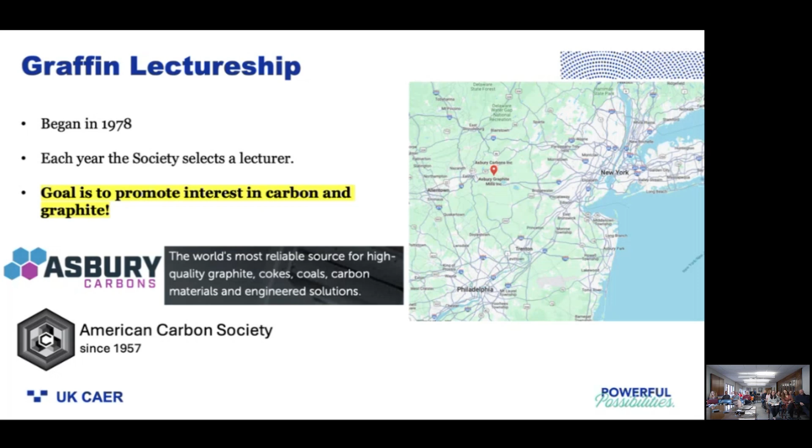I thought I would just kick off by describing some of the applications. I'm sure many of you are very familiar with these, but it gets us moving down the path in this area. Obviously, commercial aerospace is probably the largest synonymous area of carbon fiber, and the single largest demand side for carbon fiber for passenger aircraft. Obviously, you want really lightweight, strong materials for aircraft.

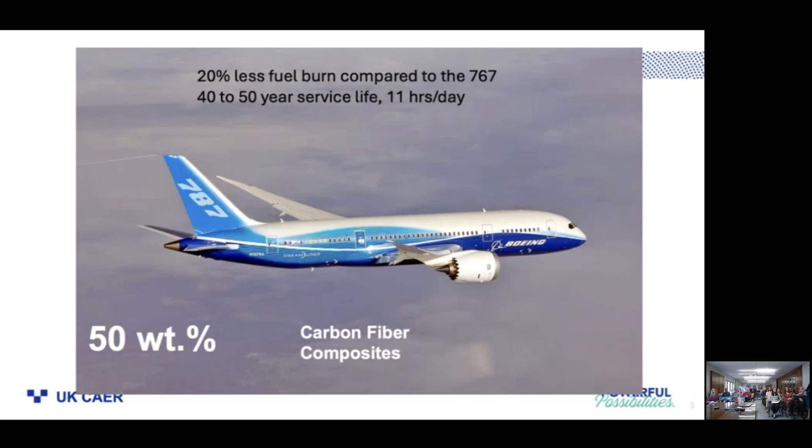Boeing picked up on this in the early 2000s and produced their 787 using something on the order of 50% weight carbon fiber composites to essentially enable a big jump in fuel economy. That's a big deal for an aircraft that has a service life of 40 to 50 years and is flying on average something about 11 hours a day. It's a lot of fuel. But the same physics apply to other things, and I'll get to that.

Another area that carbon fiber composites are really growing in is wind energy. You guys have seen these windmills, and they're made usually with 3 large wind blades.

And those blades, as they get longer, they circumscribe a larger circle. That's directly proportional to the amount of power they can generate. Also, as those blades go higher in the air, they can generate more power. But if you make a longer blade, you need to stiffen it or it's going to flop around, which is bad news. So they incorporate what they call a spar cap, basically an I-beam of sorts made out of carbon fiber, that goes on the inside of these rather large windmill blades.

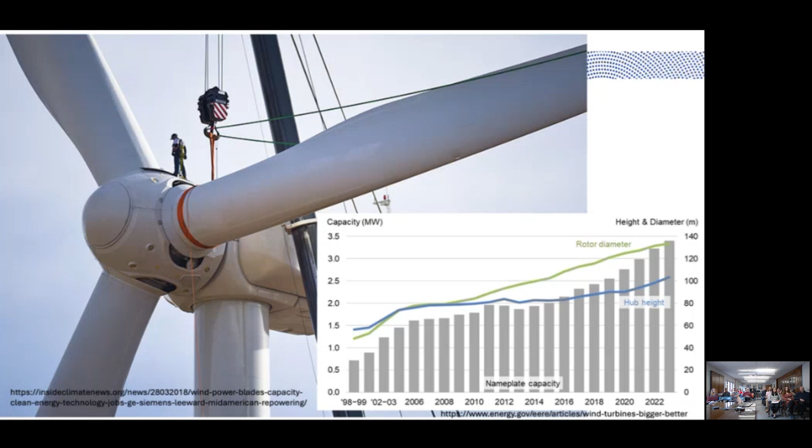But in any case, even carbon fiber wheels in these kinds of cases, now really rare, right? But larger volume carbon fiber production cars have occurred. This is BMW and SGL's joint venture into the production of their i3 vehicle. Now, that vehicle is no longer produced, I think they stopped production in 2022, and I'll touch on why I think that might have occurred. But the same physics applies: if you can lightweight vehicles, you can improve their fuel economy, or just the energy utilization of the vehicle.

And the same thing all the way down to bikes, right? So serious cyclists are looking at things like carbon fiber bikes and are willing to pay a pretty large price for those.

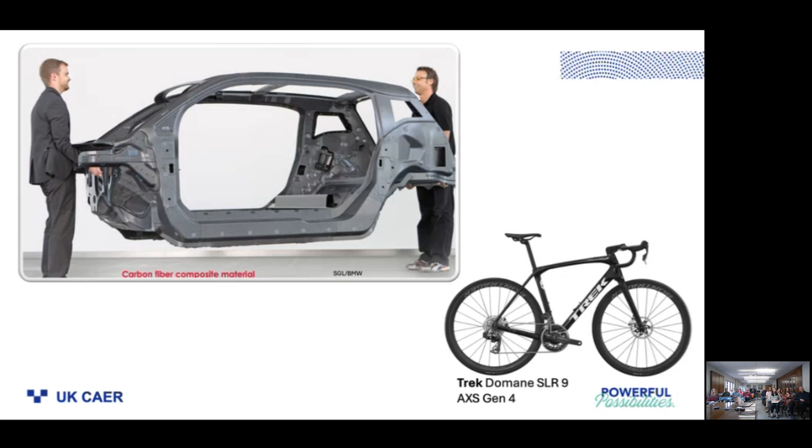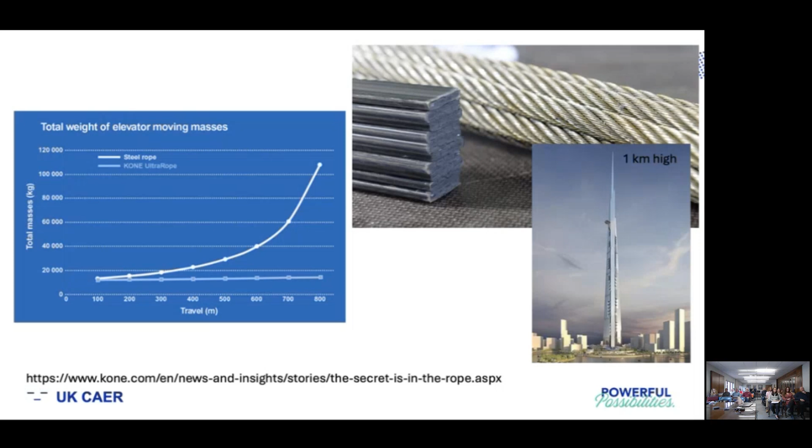This is an interesting application I thought I would also highlight because it really capitalizes specifically on the high tensile properties of carbon fiber - really, it's the high tensile strength per unit density. In really high-rise buildings, these elevator shafts containing multiple steel cables, the weight of the steel cable itself can far outweigh the car and the people in it. And so as you go ever higher, the advantage of using a lightweight tensile cable, in this case, is pretty evident. So I thought it was an interesting application for using high tensile strength carbon fiber.

And then in the world of science fiction is the elevator to space. Folks have seriously studied this, and it is in principle possible, but in practicality not, because we don't have a material that can handle the amount of tensile stress - it effectively weighs too much to do. This was made famous in Arthur C. Clarke's book, The Fountains of Paradise, in 1979, but there were concepts of this going back into the 1950s.

But it all comes down to the specific properties of the carbon fiber, and I want to define that. That's the strength of the material on the y-axis, the strength per unit density of the material, in this case versus the modulus - the resistance to deformation under load - divided by its density. So if we look up in the upper right quadrant of this chart, we'll find the highest performing lightweight materials in tension that we know of.

All of these in blue, the blue open circles, are carbon fibers derived from polyacrylonitrile, and we'll get to that and unpack it a little bit more. But these far outperform other materials, for example metals down here in the very low left corner, as you might expect, and then some other carbon fibers and glass fiber.

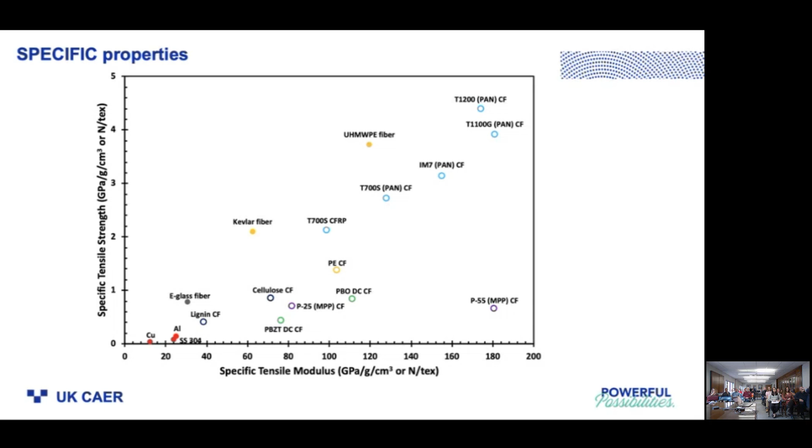It's interesting that polyethylene fiber is performing so well here, but we can't forget that polyethylene doesn't like to be heated much, right? And the other thing is that polyethylene strains more, it actually stretches more. So these carbon fibers, used to make composite overwrapped pressure vessels containing 10,000 psi hydrogen for example, have to contain that measure of load, but they don't need to expand a lot either, and they have to resist temperature. Those concepts apply across all the applications I talked about: primary structure in aerospace, even down to hoisting cables for elevators.

Okay, I want to now dive back into history a little bit. Where did all this come from? How did we land on making fibers from carbon for purposes like strength? Well, that story begins in the middle of the 1800s, when folks were looking at trying to produce artificial light.

And the one that comes up, of course, is the graphite arc lamp that was lighting the streets of London at this time. You have two graphite elements or electrodes, and you run current through them, striking an arc between them. It's almost like a welder, right? So this bright light was lighting the streets, buzzing along, and it was all made possible by the carbon electrodes.

At the same time, there was a lot of interest in getting to an incandescent light bulb. After all, this is sort of the height of the Industrial Revolution. Folks, of course, want to be able to light their homes, right? Because we're using candles and whale oil lamps, but really want to light the factory floors and keep production moving.

And the incandescent was one of the things that folks were really trying to get at. Of note was the British inventor, Sir Joseph Swan, who between 1850 and 1880 was doing all sorts of experiments to land on a functioning light bulb. In doing so, he patented this in England and in the US as well, describing that he could produce a conductive element from carbonized cotton thread. Other materials would essentially burn up or melt when you tried to run enough current through them to have them light up.

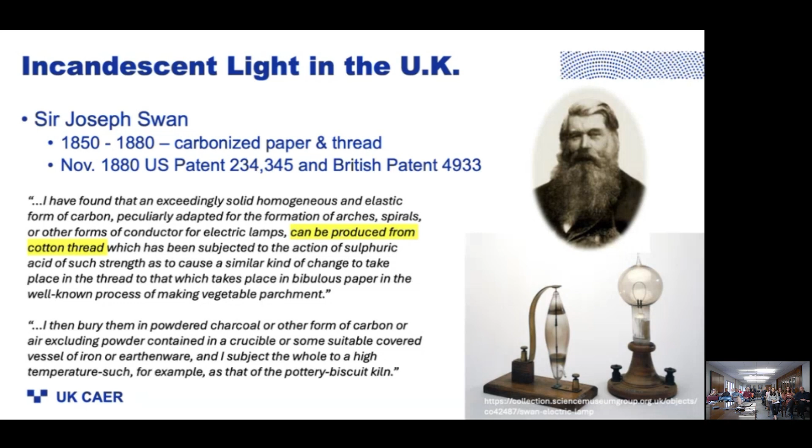So I found this to be an interesting historical point. Right around the same time, in fact a couple of months earlier, although exactly who did what first is certainly controversial, Edison patented in 1880 in the US the same effective outcome: carbonized linen thread, cotton thread, wood splints, and so on and so forth.

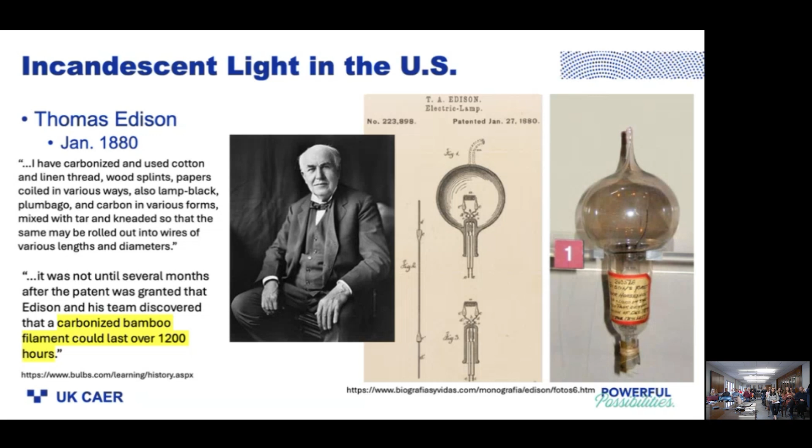These are shown - you can't really see them - but in the light bulbs, these are brittle filaments. They wouldn't really be a carbon fiber that we know of today with any sort of supple character, but they survived the current and were able to incandesce. Not long later, Edison reported a carbonized bamboo filament that got up to 1,200 hours on a light bulb in the 1880s. This was all supplanted by the tungsten filament light bulb, which came into existence around 1904, except for some really boutique applications of carbon filaments on Navy ships.

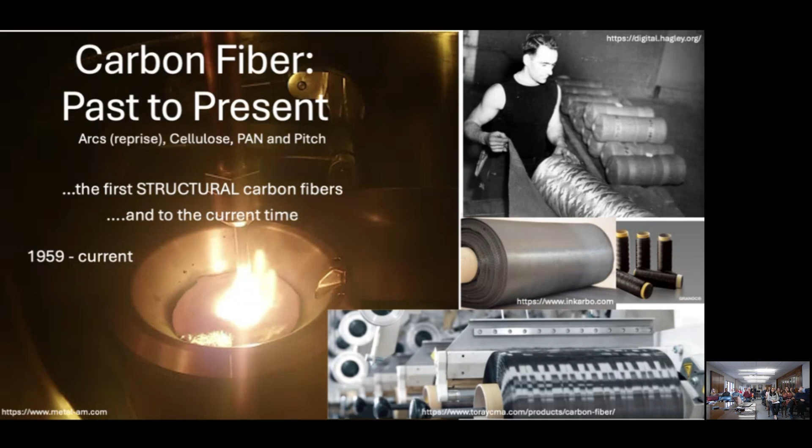Now, when we think of carbon fiber, we don't really think of filaments and light bulbs, but there's a tie back to this. The fibers that we think of are supple and strong and can behave like a textile or a fabric. These, however, have their roots in the arcs and the light studies that were going on. We'll talk in a minute about cellulose fiber, PAN fiber, and pitch fiber, but I want to get on to the first structural carbon fibers, which were about a century later, starting around 1959.

Around this time, Roger Bacon began work at the Union Carbide Corporation in Parma, Ohio, and in the late 1950s was studying the triple point of carbon - the point at which carbon, solid, liquid, and vapor, that's right, vaporized carbon, exist in equilibrium. He was working at an incredibly high temperature, something on the order of 3,600 degrees C, achieved by doing arc discharge. He was running current through graphite electrodes, striking an arc at extremely high temperatures, albeit very transient, but under extremely high pressure.

I think this was high pneumatic pressures of noble gases in this cell. And when he took the cells apart, he noticed over and over that on one of the electrodes, there had grown all these whiskers of graphite. He described breaking up one of those electrodes, and it looked like Christmas tinsel of all these little whiskers of graphite. He took those out and began to study them and found that he could take these little whiskers of graphite and kink them back and forth, and they would bounce back.

He was able to test them in tension and found the tensile strength of these was something around 20 gigapascal. Just to be clear, that's more than double the tensile strength of the best carbon fiber you can commercially lay your hands on these days. Also with a modulus of about 1 terapascal, or 1,000 gigapascal. This is consistent with loading graphite along the basal planes like a perfect single crystal graphite - these were essentially perfect single crystal whiskers of graphite.

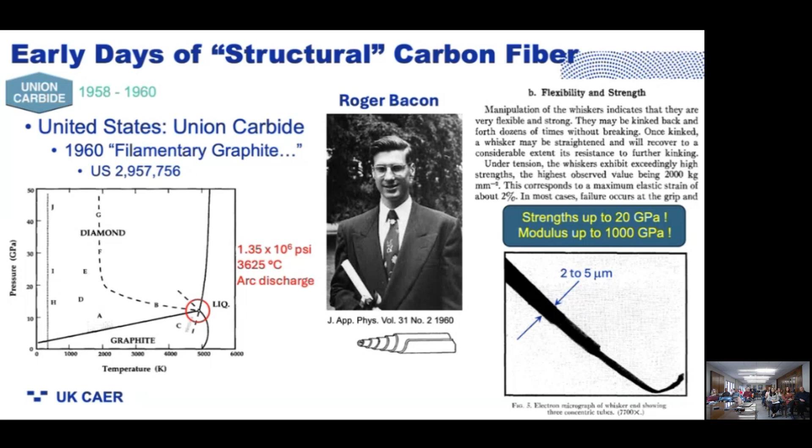Union Carbide knew they couldn't really scale up all these little whiskers of carbon. So what did they do? They looked back and remembered, almost a century before, folks had been carbonizing cotton, cellulose, to make light bulbs. And at the same time, DuPont had established one of the first synthetic fibers, the rayon fiber, based on cellulose, started in 1924. So about 30 years later...

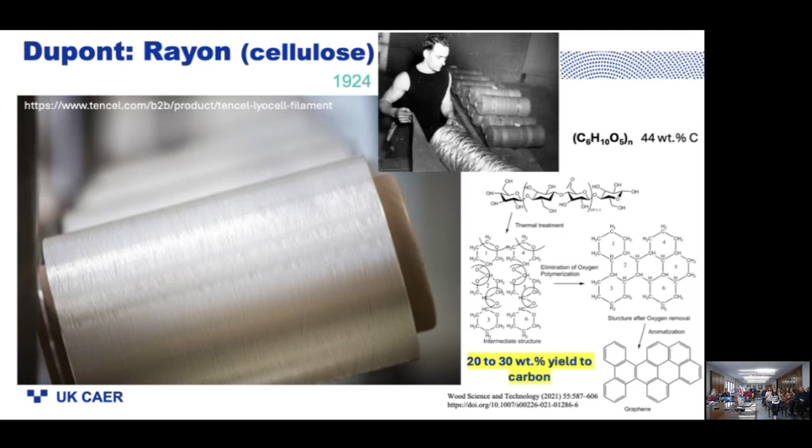Union Carbide began to study carbonizing fibers of cellulose for higher strength. It should be pointed out that cellulose has got a lot of oxygen in it, which isn't good if you're interested in carbon yield. Something like 20 to 30% of the weight of the cellulose was converted to carbon. It's kind of low, but nonetheless they were successful in producing a carbon fiber with pretty good strength for the day, about 900 megapascals.

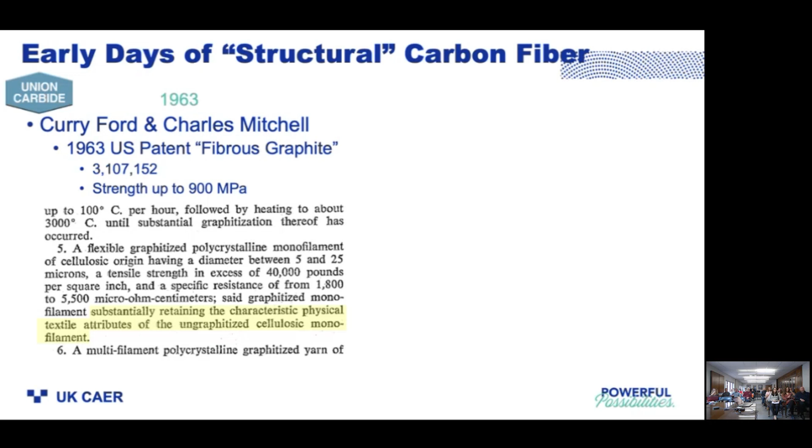The following year, 1964, Bacon and his colleagues patented what they called a hot stretching process. They took these cellulose fibers through furnaces and stretched them while forming, producing a modulus of 172 with a strength of 1.25 gigapascal. Low by today's standards, but in 1964 this was the first structural carbon fiber ever produced, marketed as Thornel 25, and it went into NASA's Gemini program at the time.

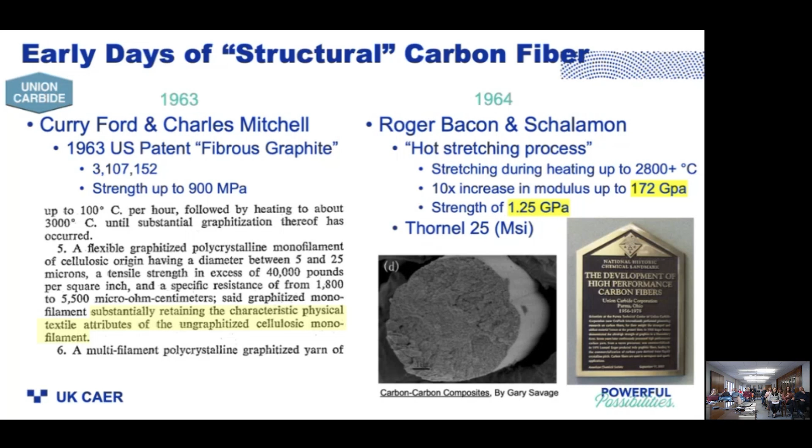I should point out that for this and other things, Union Carbide was awarded a National Historic Chemical Landmark. So up in Parma, they have this landmark for the development of high-performance carbon fiber.

Ray Houtz was a chemist there who described that he could see the fiber would change color as it was heated, from white to yellow to brown to black, and that the black yarn was remarkably stable to further heating, even in a Bunsen burner flame. So this gave insight that this fiber too could be of great interest as a carbon fiber.

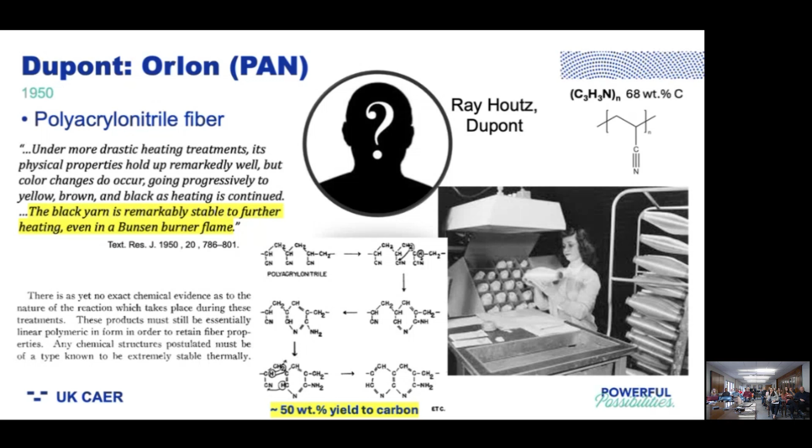In the same 1950 paper, he described also the chemical conversion of polyacrylonitrile to the stabilized intermediate, essentially. And folks were recognizing that something on the order of half of the mass could be converted to carbon.

In Japan, at the Government Industrial Research Institute in Osaka, in the late 50s, Akio Shindo got his hands on a Scientific American magazine that reported the cellulose fiber carbon. And he got a sample of DuPont's Orlon fiber and began to carbonize that in his labs in Japan.

What he did at first was take a really tiny amount of the pan fiber and put it in his furnace, converting it to carbon, and observed that out of the furnace came a very nice, supple fiber that he could wrap around his fingers and pull. However, when he repeated the experiment with a lot more fiber, what came out was very, very brittle.

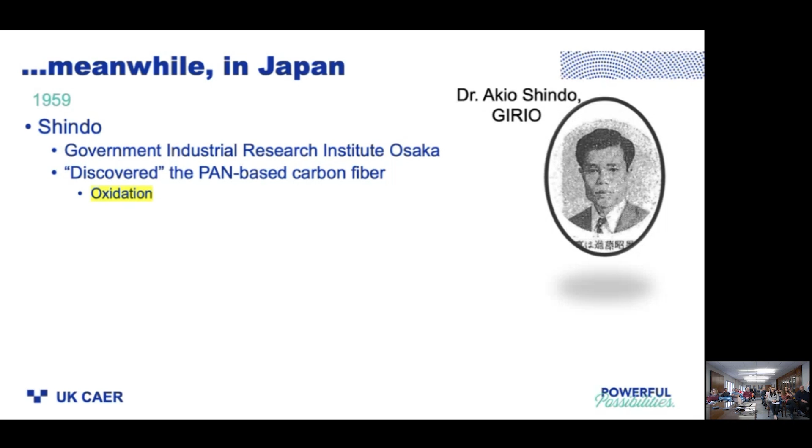This gave us, for the first time, insight into the role of oxygen in the very front-end heating process. In the latter case, he consumed all the oxygen and didn't arrive at a nice oxidized intermediate, and the resultant carbon fibers were quite brittle. So this was a big leap in pan-based carbon fiber, occurring right at the end of the 1950s.

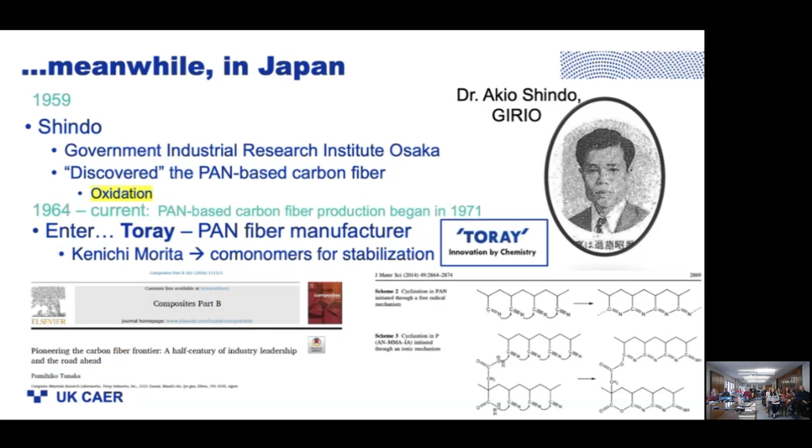In 1964, Toray, the big Japanese fiber manufacturer, got quite interested in this and effectively commercialized the pan-based carbon fiber, which hit the market in 1971. They did a lot of work in comonomers for stabilization around that time as well, but they were really first on the scene for the pan-based carbon fiber.

In England, in the late 60s, at the Royal Aircraft Establishment in Farnborough, Dr. William Watt and his team were also really interested in carbon fiber. After all, they had come from the World War II era and were trying to stay on the cutting edge of aviation. They knew that these really high strength, lightweight fibers were going to be enabling for new generations of aerospace materials.

His crew is credited with applying tension during the stabilization of these pan fibers, much like Bacon did in the conversion of the cellulose fibers. In fact, in his patent, it describes the necessity to restrict length shrinkage, or even stretch the fibers, during the oxidation process.

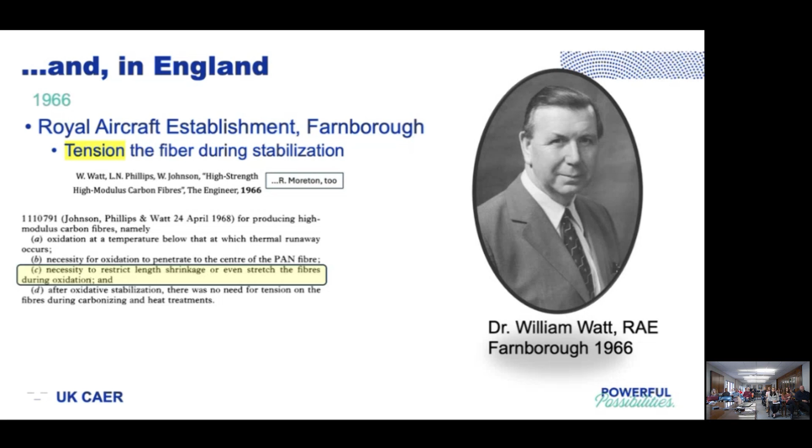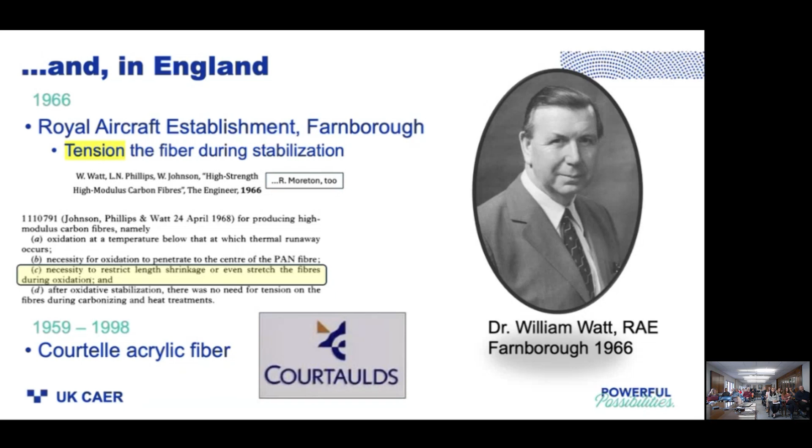In England, the fiber manufacturer there was Courtaulds, sort of the DuPont of England, and they were producing acrylic fiber. They also teamed up with the Royal Aircraft Establishment and Rolls-Royce to essentially commercialize and scale up PAN-based carbon fiber in England. Back in Japan, in the mid-60s, Otani and his group reported for the first time making carbon fibers from pitch.

Now, I think you guys probably know a little bit more about what pitch is. A lot of folks have no idea, but briefly, unlike a polymer, it is comprised of small molecules - in this case, these polycyclic aromatic molecules over here on the right. Otani showed that he could spin these into fibers and convert those into carbon.

And the yields were really high - something like 50 to 80% of the mass of those fibers will be converted to carbon. So Union Carbide kind of latched onto these results as well and doubled down efforts to try to produce carbon fibers from what they call the mesophase pitch.

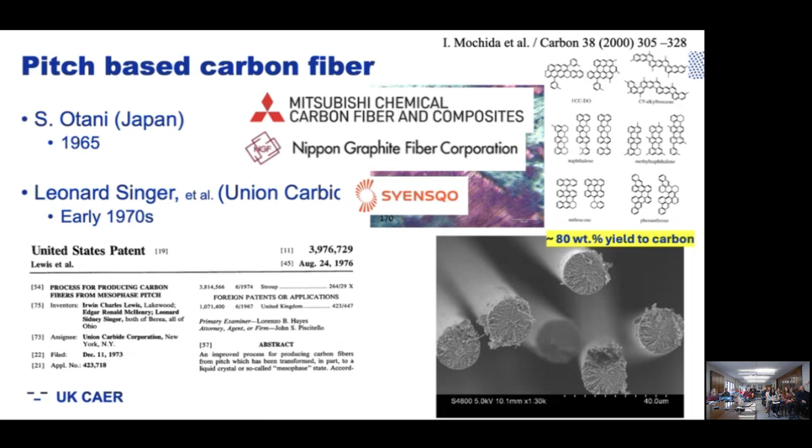Lewis and Singer, also Graffin lecturers that I pointed out, were highly involved in the development of the mesophase pitch-based carbon fiber. These are fibers that create a really high degree of graphitization, and I'll talk about some of the pros and cons of those. But today, there are only three companies in the world producing mesophase pitch-based carbon fibers - two in Japan, and one still the remnant of Union Carbide operating in Greenville, South Carolina.

Now, the advantages of the mesophase pitch-based carbon fiber is that it's melt spun and fairly low cost. PAN-based fiber has to be spun from solution, pretty much like cellulose fiber as well. Melting and spinning is just far simpler - that's good. Also, no tensioning is needed during the thermal conversions of those fibers, so that's good. Extremely high yield - 80% of the mass converts to carbon. That's good.

Really high modulus fibers are capable - you can see in red here, these really high pitch-based carbon fiber moduli can be accessed. And along those lines, high thermal conductivity of those fibers. But disadvantages with respect to PAN is these fibers are far more brittle, far lower strain to failure, low compressive strength, and they have a high price.

I don't think that's the same as saying they're high cost - there's, I think, a pretty large margin in the pitch-based carbon fibers. But these disadvantages, particularly the low strain to failure and the brittleness, is really the issue. And the PAN-based fibers offer a higher, tougher fiber that's more stretchy, and toughness wins at the end of the day for a lot of these composites.

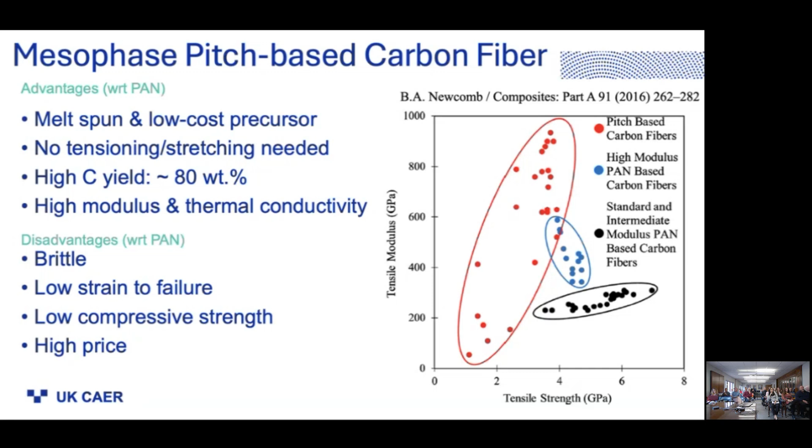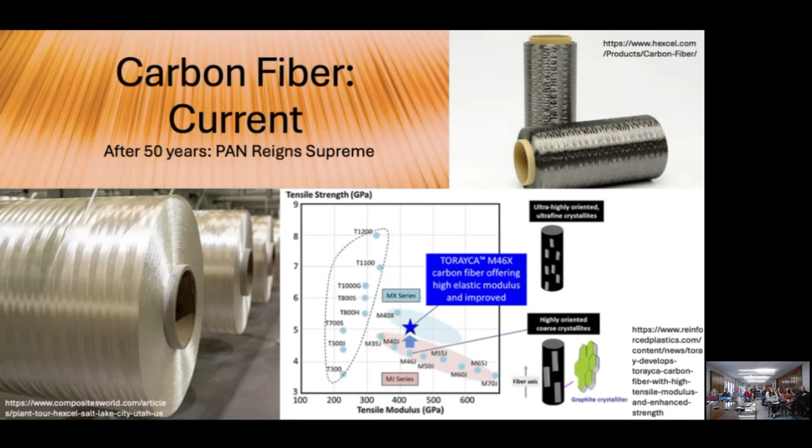After all, you don't want to build primary aircraft structure that's brittle. You want it to be light and strong and not deform a lot, but you don't want it to crack like an egg. So that means after 50 years since 1971, the PAN-based carbon fiber, I would say, still reigns supreme by far - something like 90% of the market is PAN-based carbon fiber, and I think generously 10% is pitch-based. And as I mentioned, all this stems from the high toughness of the PAN-based carbon fibers for primary aerospace, which has really propelled it in recent decades.

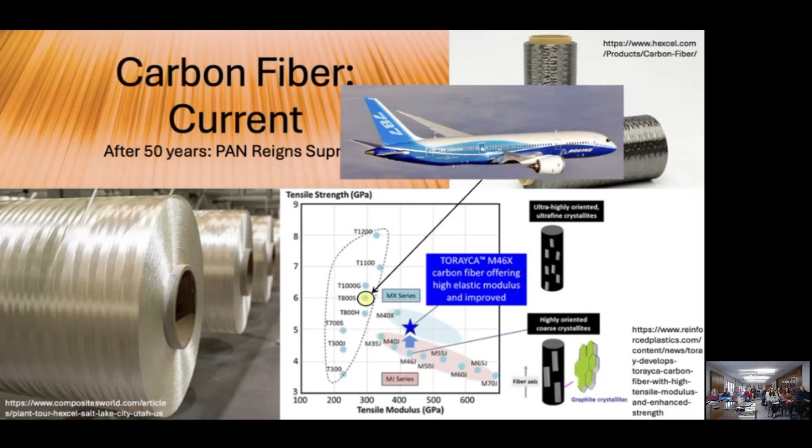Just as a recap on the PAN-based carbon fibers: in Japan, starting in the early 1960s and into the early 70s, Toray by then had established themselves as the first production of PAN-based carbon fiber. In the US, all of the earliest work was with Union Carbide, which eventually did a joint technology agreement with Toray at that time in the early 70s. That company essentially became Amoco, then BP Amoco, and Amoco Performance Products - I'm not sure on the exact chronology of that - then became Cytec Group, then Solvay, and now is Syensqo at Greenville, South Carolina.

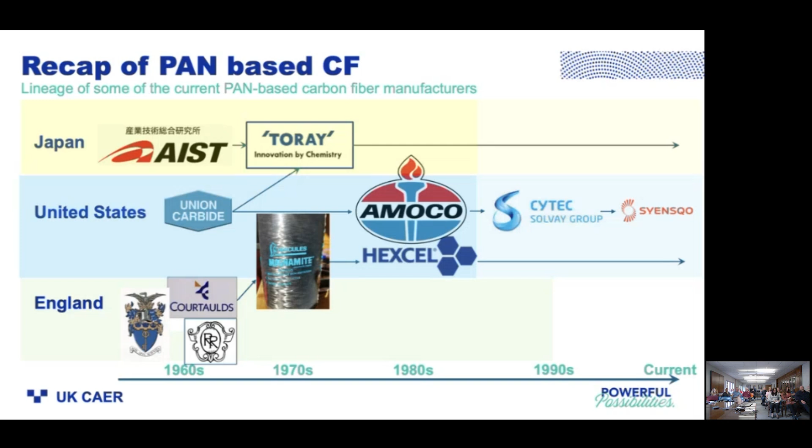In England, the group with Courtaulds and the Royal Aircraft Establishment started with help from Rolls-Royce. Those precursors were used in the first Hercules fibers, which were carbon fibers produced in Delaware, which became the Hexcel Corporation, which still operates today, making fibers in Alabama and in Utah.

But the bottom line is that if we want to focus on the strength of the carbon fiber, that has evolved over these 50 years kind of slowly. Apart from this group of points here in the late 80s, mid-late 80s, this strength marches up pretty linearly over the course of 50 years, starting at around 2.5 gigapascal. And last year, about one year ago exactly, Toray introduced the T1200 at an 8 gigapascal strength.

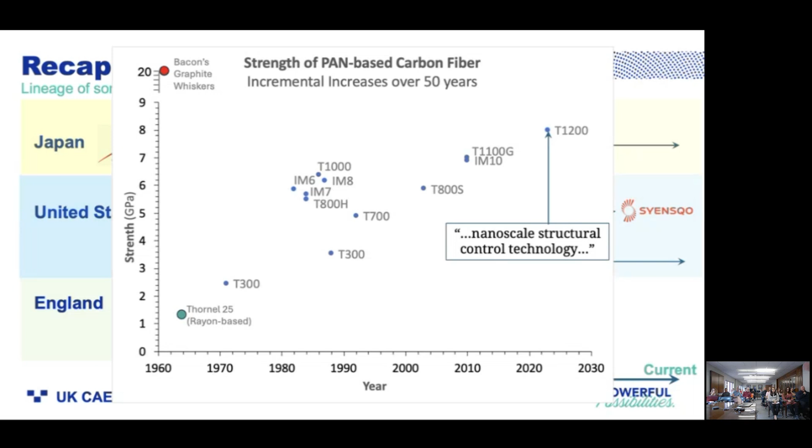All this kind of starting back in 1964 with Union Carbide's Thornel 25 at 1.25 gigapascal strength. But let's not forget that this was all kicked off by Bacon's graphite whiskers at 20 gigapascal strength in 1959. So we still have room to advance the carbon fiber, but still reaching a tensile strength of 8 gigapascal is pretty remarkable. And it's really limited by the defects on those fibers.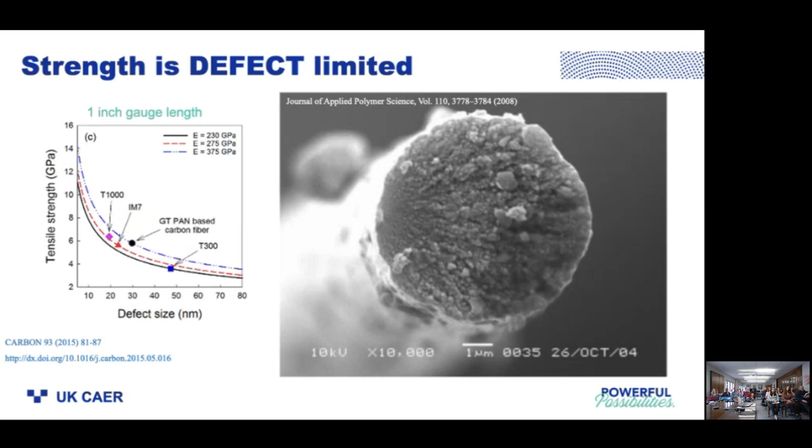That means thousands of tons of these carbon fibers being produced cannot really survive or can't claim that level of average tensile strength only if they have defects less than 20 nanometers over thousands of miles of carbon fiber. That's the strength limitation.

And if you extrapolate that a little further, you can see that if we consider a defect that would be 1 nanometer, which is 1/1000000000th of a meter on the filament, those strengths would be predicted to be somewhere on the order of 20 gigapascal, which is in fact what Bacon observed in 1959. But doing that over long lengths, over long scales, is the real heart of the manufacturing challenge of carbon fiber to achieve high strength carbon fiber.

Also, these pan-based carbon fibers are not particularly graphitic, the high-strength pan fibers. In fact, this publication describes that they're produced in this temperature range of 1200 to 1400 degrees, whereas these highly graphitic fibers will see temperatures far over 1800, maybe even over 2500 degrees C.

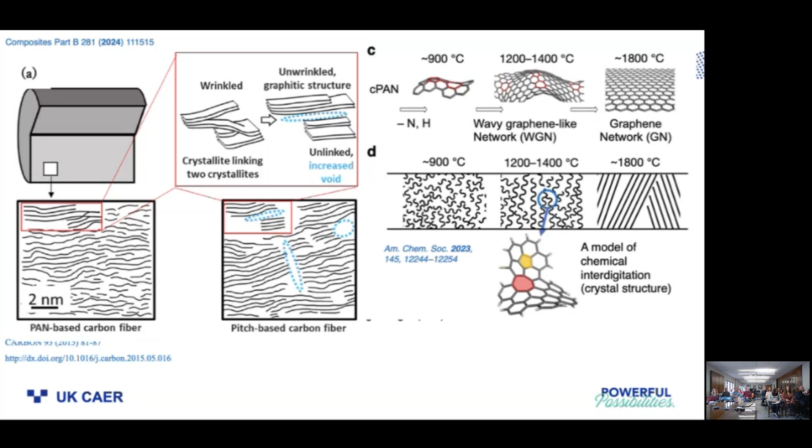So you're left with a structure which is in this case described as a wavy graphene-like structure. You have more of an amorphous type structure in the carbon, albeit it's largely all oriented along the axis of the filament. There isn't long-range order as you would find in a highly crystalline graphitic fiber. And the constituent basal planes are wrapped into each other.

And one way I would explain this is let's step back. Have any of you guys ever split a piece of wood with, say, an axe? If you have wood that has really oriented grain, it's far easier to split. But if you have, for example, wood that has some gnarled character to it, you're going to have to wrestle that to get it to split.

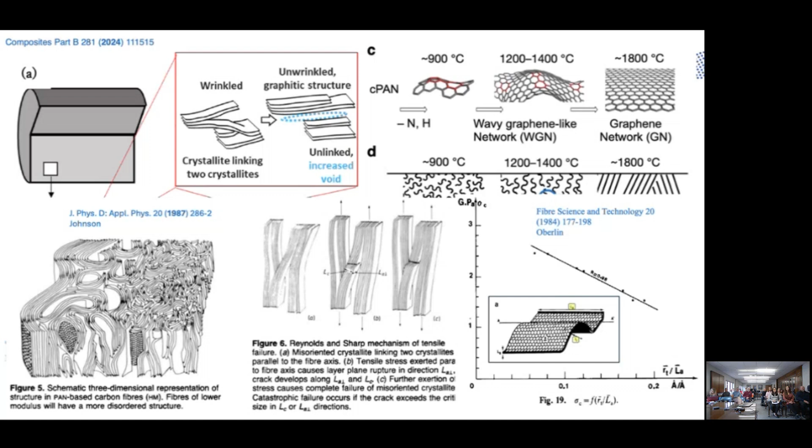So that somewhat analogously is going on in these carbon fiber structures. The issue is you need material that is resistant to the propagation of cracks, and in this case, very micro cracks. That's what gives you the high strength and the high strain to failure of these pan-based fibers compared to the very graphitic fibers like the mesophase pitch fiber.

Okay, so I want to now, having discussed about history and properties of pan-based and other carbon fibers, turn your attention to what we do at my lab at the University of Kentucky. We do research on pan-based carbon fibers. And to do that, we have to make our own pan precursor fibers.

This is done through a solution spinning process. It kind of plays out from left to right on the screen. But I want to point this out: this means that unlike nylon or polypropylene or polyesters, which you can melt, and just sort of pump the molten polymer through a shower head of holes and draw that down to filaments,

polyacrylonitrile doesn't do that. If you try to melt it, it's pretty akin to trying to melt baking flour or something like that. It just burns. It essentially pyrolyzes. You're not going to find yourself with a liquid.

But after all, that's what you want, right? Because if you had thermoplastic meltable polymer fibers, when you went to carbonize those to produce carbon fiber, you'd melt them all together. That's not good. So solution spinning is the way that polyacrylonitrile fiber is produced.

It involves extruding the filaments through a shower head of holes through an air gap. This air gap is about 1 centimeter, and then we're accelerating those filaments down into a liquid bath. The solvent diffuses into the liquid bath, which contains water. Water diffuses into the forming nascent filaments and essentially precipitates that into solid polyacrylonitrile.

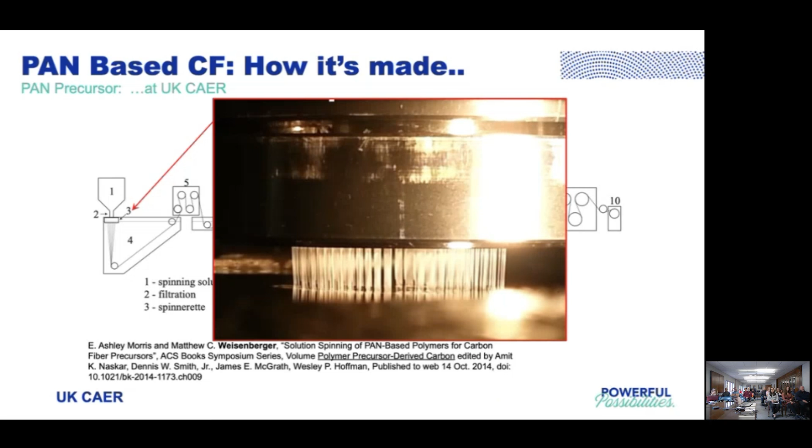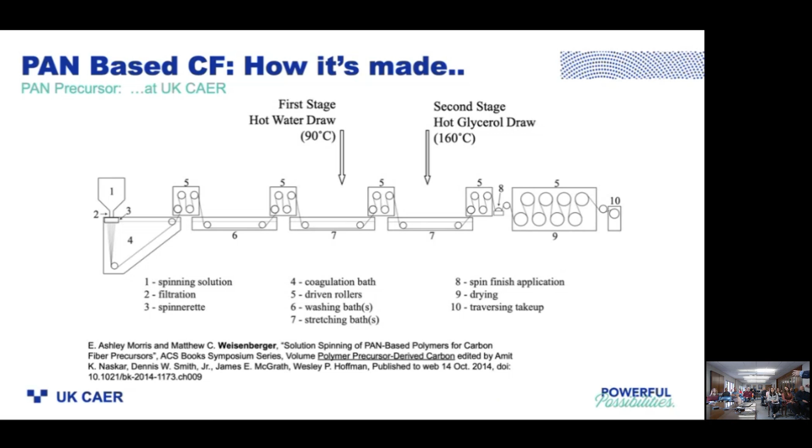This then goes down the spin line to be washed and stretched. We stretch it in boiling water or really hot water, and then stretched again in hot glycerol to get the temperature up a little bit higher above the glass transition. And then we apply a spin finish, dry the fibers and take those up.

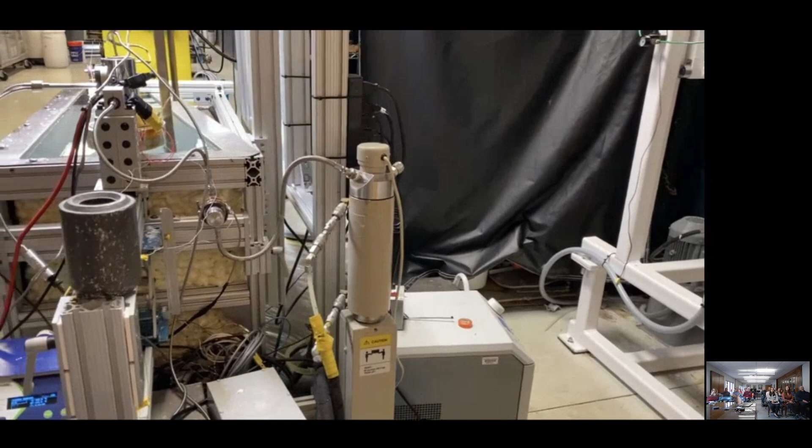Good. So in this case, we'll have experimental polyacrylonitrile dope, our solution, in this pump. We'll pump it through a filter and then over to the spin head with this sort of yellow insulating foam on it. The filaments form in the air gap and then are drawn down into this bath, forming.

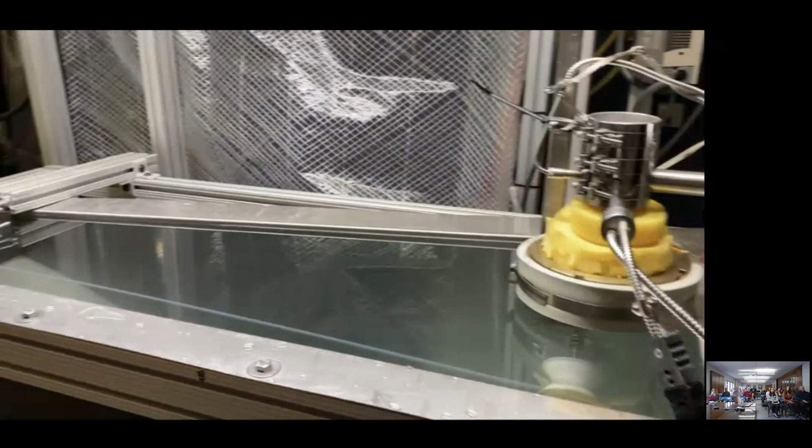In this case, it's, I think, a 100 filament tow that's being formed and being taken up. When I say tow, that's just the unidirectional collimated bundle of the filaments. In industry, that would be more like 3,000, 12,000, 24,000.

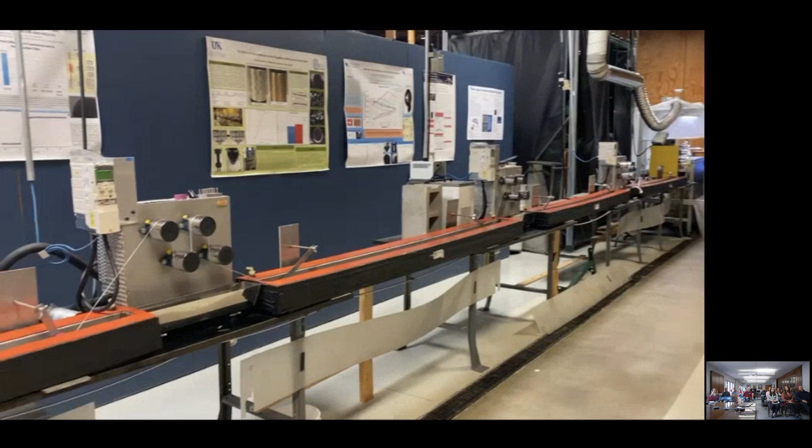We're doing 100. After that, the tow makes its way down the line through water baths, which are there to essentially wash the fiber of any residual solvent that's trapped within the porosity of the nascent filaments. And then down when we get to the end here, we're going to do some higher temperature stretching.

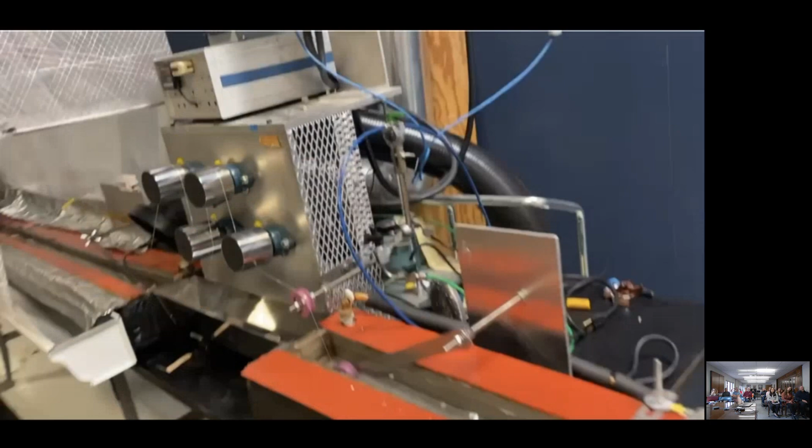Which is going to go kind of fast here. The fibers are drawn through hot water. We're essentially accelerating and attenuating the filaments. They're dried, and then the dry filaments go into hot glycerol above the glass transition temperature. They're drawn again, and then you can see that the filament's smaller, maybe a little bit more lustrous.

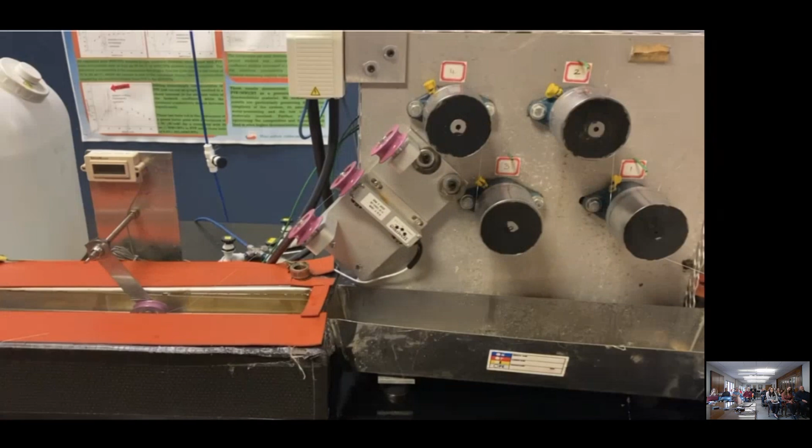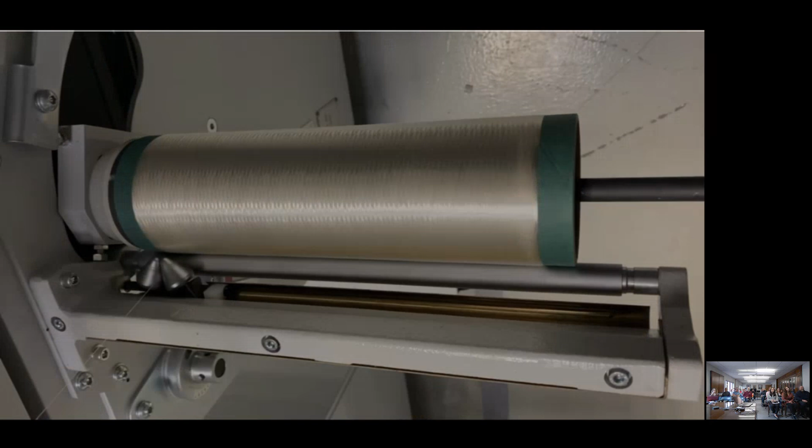That filament goes through hot water to wash off any excess glycerol. We apply a spin finish, dry that, and then the filament's taken up. It's a really fast video, everybody, but that's essentially how industry produces pan-based carbon fiber. We rather mimic that in our lab so we can get away with small quantities, yet produce enough to do some meaningful research on. Now, those fibers will be converted to carbon thermally.

As I mentioned, back to 1950, you certainly observe this color transition from white to yellow to brown to black as we go through chemical transitions associated with the cyclization of the nitrile group on the polyacrylonitrile, forming these intermediate cyclic structures, which have some measure of oxygen functionalities on them. That's what we call the stabilized polyacrylonitrile, which is ready then to be subjected to the high temperatures of carbonization.

This is done usually between 500 and 1500 C for most of our standard and intermediate modulus grade carbon fibers, and some heat treated above 2200 to form higher modulus carbon fibers.

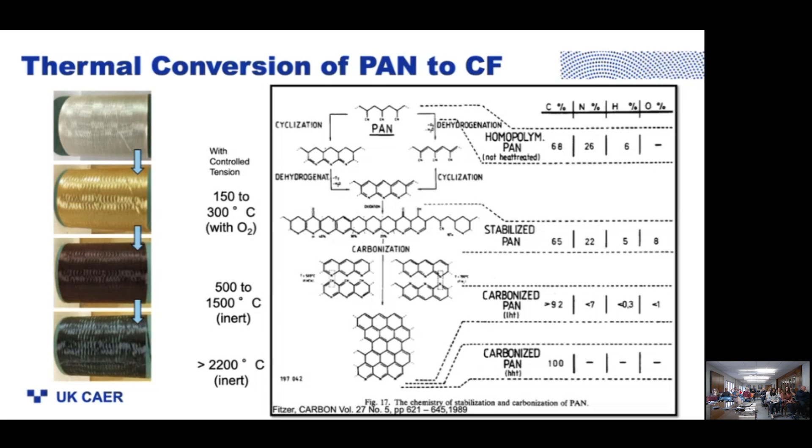However, on the carbonization side, we have what we call our low temp and high temp carbonizations. Those processes will happen on the order of about 100 seconds. So the oxidation side of producing pan-based carbon fiber is slow, really slow.

When you go look at these, you can see the bobbins, or the cores, turning at just really slow rates. Relative to if you went to a textile plant, it would be zipping along producing fiber really fast. In fact, the precursor fiber spinning back here is relatively fast compared to this.

So carbon fiber production is slow. This is partly why carbon fibers are expensive. We need to figure out ways to do this faster, perhaps. Let's come back to that.

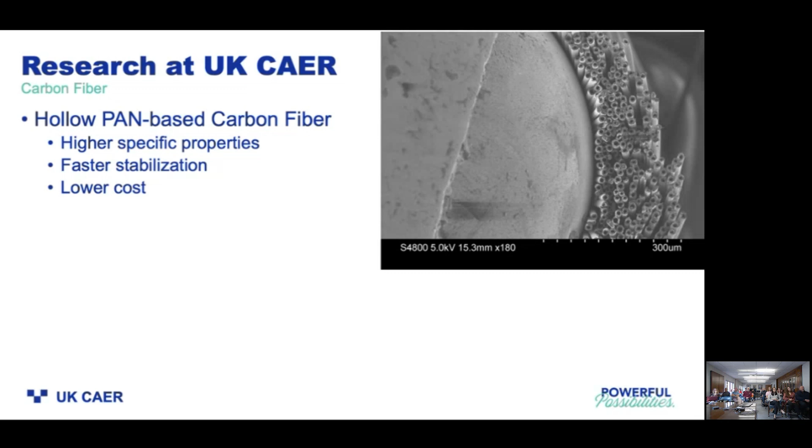You can see on the upper right, those are some of our hollow carbon fibers that we produced from pan. Why? Well, we're interested in always increasing specific properties, and a hollow fiber, for all intents and purposes, has lower density. After all, the composite matrix doesn't know the fiber's hollow. There are other reasons too, chief of which is we have the prospect of achieving stabilization much faster in a hollow filament relative to a solid one, and lower cost because we could produce them faster and so forth.

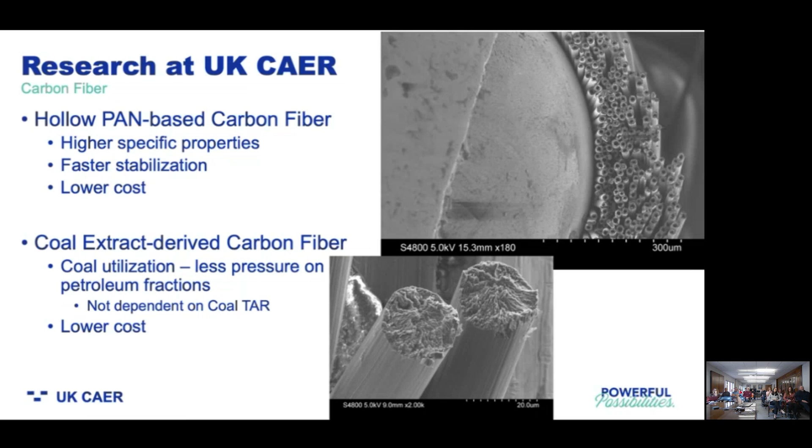We're also producing pitch-based carbon fibers from coal, particularly from coal extract. This is of interest, generally speaking, from the point of view of coal utilization, but there is also quite a lot of pressure on coal tar, and less of that stuff around, which is used for a host of applications in the metallurgical business. So we'll talk about those two things.

So back to the hollow fiber. Why would we be looking at hollow? Well, it turns out some of these intermediate modulus carbon fibers, like Toray T700, has a structure of a skin and a core, right? Turns out that skin is far more oriented, has higher modulus, and can essentially handle more load than the core. And this structure, we believe, is sort of an aftermath of insufficient oxidation. Even in the optical microscope, you can see the skin core structure of the oxidized pan-based carbon fiber.

We took some of Toray T700, chopped it into bits, and put it into a TGA, heated that up to 600 degrees over a couple hours. And you can see that it essentially selectively burns out the less oriented carbon, leaving these sort of pits on the ends of the cut filaments.

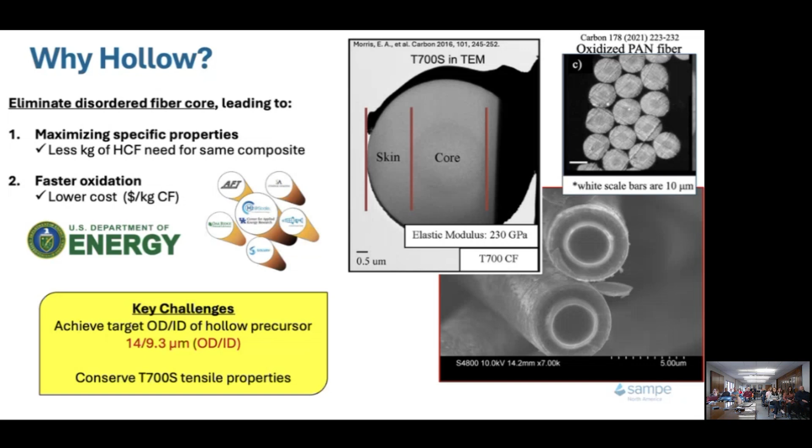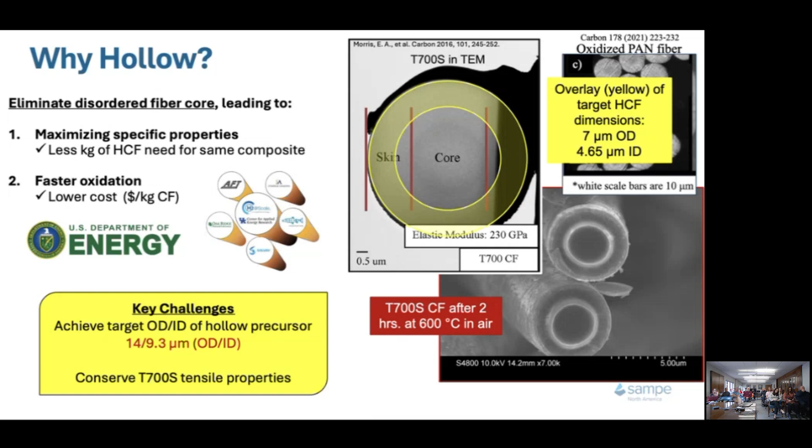So we've proposed to essentially spin a hollow fiber and make more efficient use of the carbon that is there, if at all possible, on the basis of the mass of the fiber, so the density. Our goal is to essentially produce the fiber shown in yellow. This is funded by the Department of Energy right now.

And then the other primary reason is the prospect for faster oxidation of the hollow filaments. So we took some data. Let me describe what this chart is telling us. One of the questions we always ask ourselves when we're oxidizing pan fiber is, when are the cookies done? How do you know that you've arrived at the proper oxidation state? And we follow that with the density of the filaments, which we measure by a density gradient column.

1.35 grams per cc is an ideal oxidized density. The starting pan fiber is around 1.18 grams per cc. When you take a really large diameter fiber, the number of minutes at 250 degrees C to arrive at a density of 1.35 is high. So that's the point up here. As we make smaller and smaller filaments, the number of minutes at 250 to arrive at that density marches downward.

In this case, the kind of diameters associated with the production of current pan-based carbon fibers point to something on the order of 66 minutes at 250 C to arrive at that density. We predict with our targeted hollow fiber, we would arrive there in 30 minutes. So cut that time in half. That's one of the things that we're really trying to do.

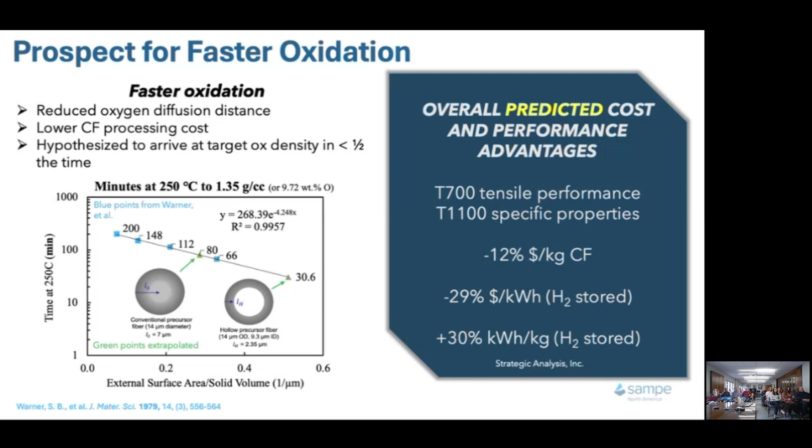Now, we haven't yet done it, and why? Well, it turns out spinning these hollow fibers is hard. Nature wants to collapse these tiny filaments as we go smaller and smaller and smaller. So my group has been really focused on trying to produce ever smaller hollow fiber precursors, and I'll show you some of those, so that we can really scientifically test this hypothesis.

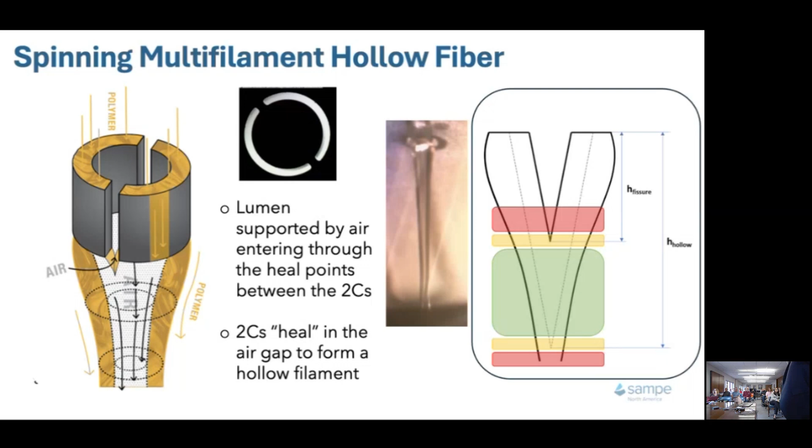We're spinning them with shaped spinneret technology. We essentially spin a left and a right side of the fiber, which, when it passes through that air gap, those two sides come together and heal. And as they heal, they create this sort of pocket at the top, which is pulling air into the inside of the fibers, almost as if it's continuously blowing a bubble, but it's preventing a vacuum from the filaments from collapsing. The length of the air gap is a big player in that. This is an actual image of a hollow fiber being formed, and you can see the two walls in that sort of microscopic image.

We published on this back in 2021, and we've made a lot of progress since then. One of the things we're interested in about this technique is that it should be able to be dropped in at existing PAN production plants—that is, the shaped spinneret technology and the processing to produce these fibers.

Are the manufacturers working on the same technology? I know that manufacturers have worked on this technology, but no one in the commercial sector is broadcasting that. However, there is one patent of interest in this area that, of all places, came from the Hyundai Motor Corporation.

So anyway, it's my opinion that folks have looked at producing hollow fibers, and some of the challenges in making them ever smaller to be relevant for producing carbon fiber have sort of deterred further advancement in the area. So we're working on that.

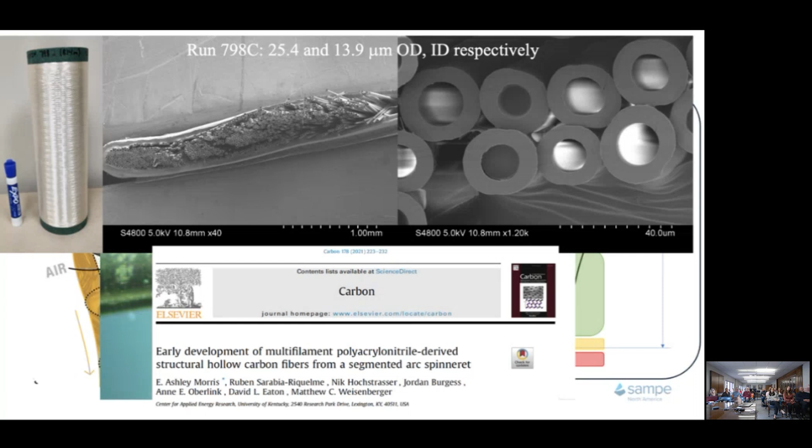We posit that on the outside is well-oxidized material, which reflects more photons because of its conjugated bonding compared to the material on the inside. So we put this to the test with Raman spectroscopy, which we mapped spatially on top of fibers that had been treated to increasing temperatures.

So if we look at 180 degrees C, we're mapping the ID to IG ratio in the Raman spatially right on top of the filament. What you need to know is that as this ID to IG ratio goes down, we're seeing more conjugated bonding associated with graphitic material.

So as it goes from red to green to blue to black, it becomes more conjugated. We've got really aliphatic material after only 180 degrees.

We go to 230 and we start to see, in the Raman spatially right on top of the fiber, this area of increased conjugated bonding. Going over to 260 it progresses, and after 270 it's progressed even more. But you still see quite a bit of red on the interior of these filaments, as you did at the very beginning.

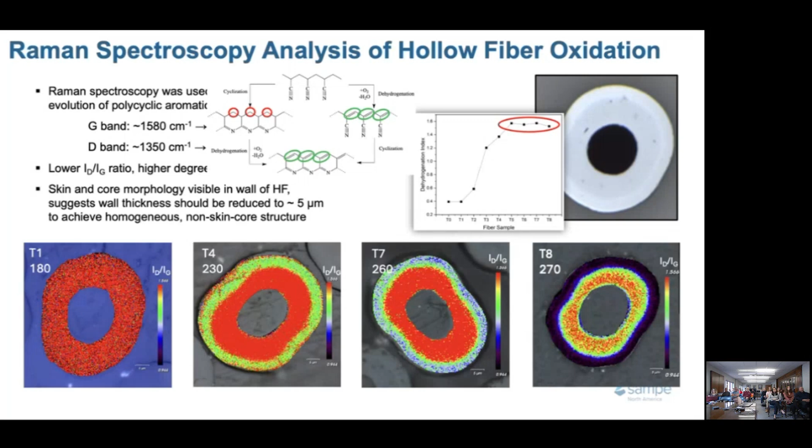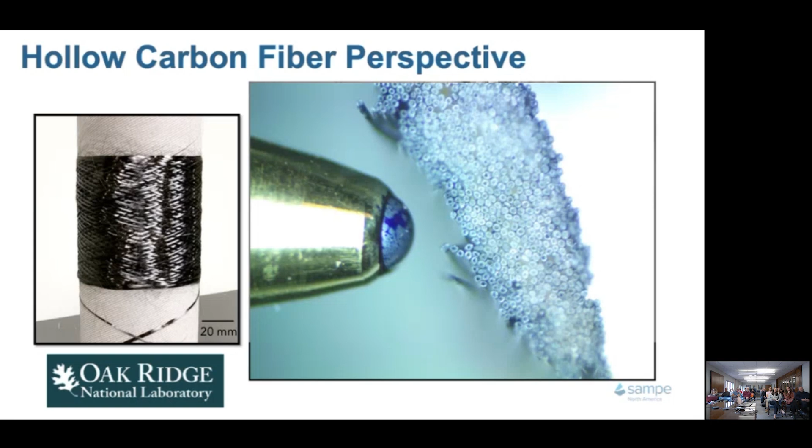We have, with our partners at Oak Ridge, been able to take continuous tows of the hollow filaments and convert those into carbon fiber continuously—this is an experimental result of that. And if we look in the SEM, this is the same ballpoint pen with these hollow carbon fibers, down to about 15 micron on the diameter.

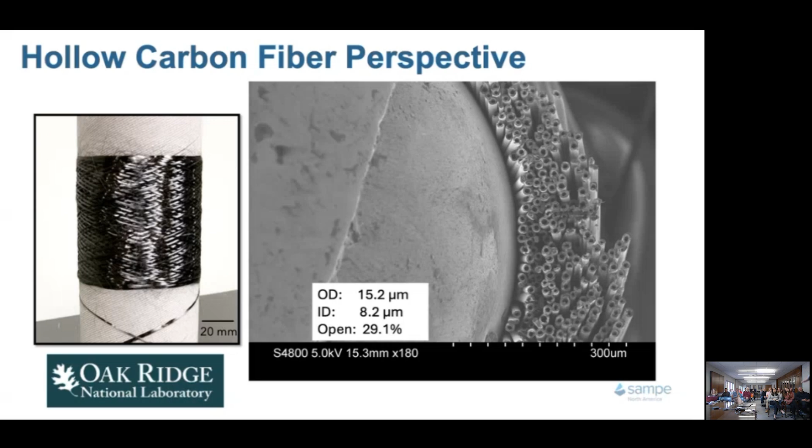We still need to get that smaller. If we look at the effective modulus we've measured, we're landing around 196 gigapascal with our 18 micron outer diameter hollow carbon fiber.

Now when we calculate that, we're using this effective diameter—that means in the cross-sectional area we're including the hole, which is fair because the composite doesn't know there's a hole there, so you have to do that. That brings our numbers down. But these results do suggest we'd arrive at 230 if we could produce a fiber that was 12 micron OD. That's where we're going.

The big point is that the effective density is now down at about 1.23 relative to about 1.8. That's a big drop in density, which I really can't underscore enough, because if you weren't concerned about density, one could argue that you would just use glass fiber and make a thicker part, spending a lot less money than going for a carbon fiber part. It's all about lower weight in the part.

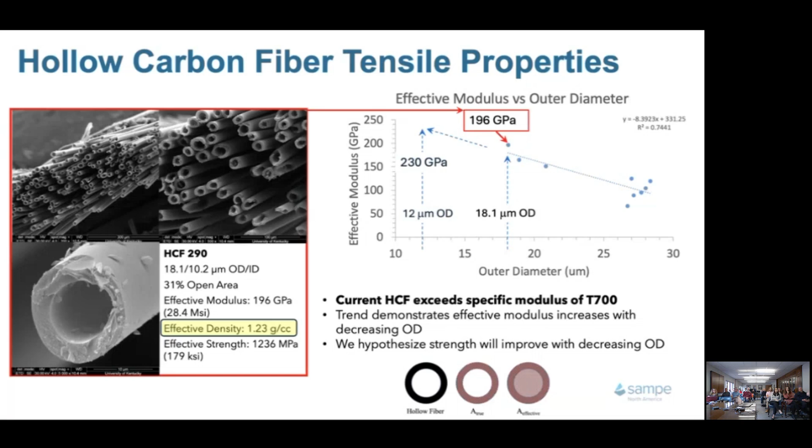Now, switching gears to our mesophase pitch-based carbon fibers from coal. We are funded by the Department of Energy to develop this. I describe this as a wide river that we're trying to bridge. On one bank we have our coal, and on the other we have our final carbon fiber.

But why doesn't it all melt back together when you heat it? Well, pitch goes through oxidation reactions as well, and those take time. So that's another issue going on with pitch-based fiber.

One application for these could be in the area of, for lack of a better term, lightweight containers for automotive electric EV batteries.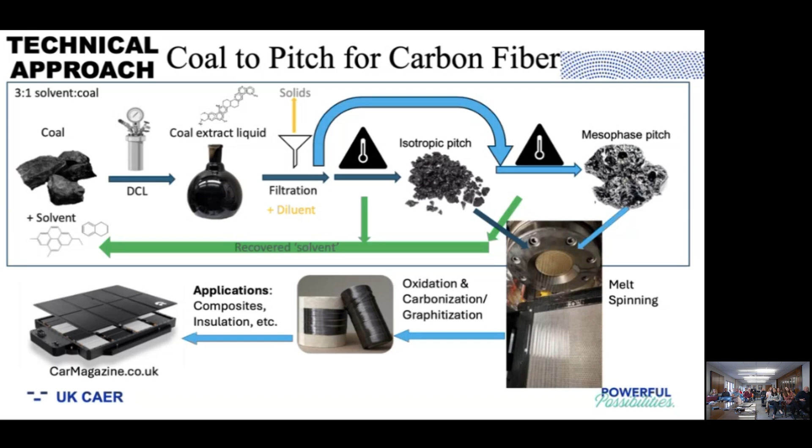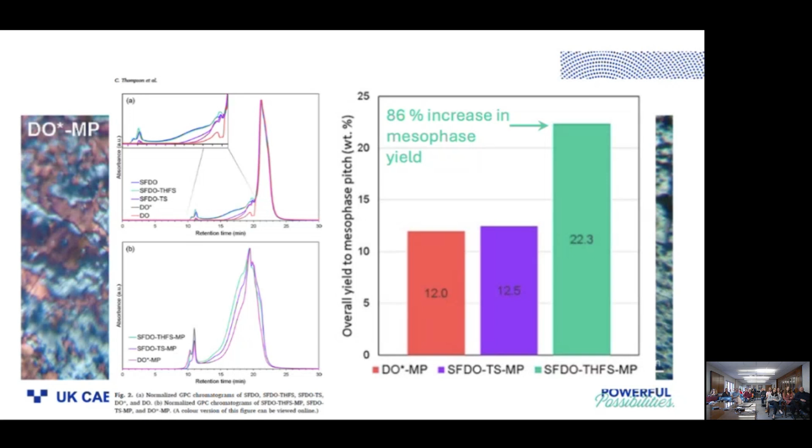We published a paper on having achieved a high performance carbon fiber from coal extract back in May, and I want to get at the takeaway of that. Bottom line, when we used our coal extract relative to our petroleum decant oil, which is the baseline for the study, we were able to produce 86% more mesophase pitch than we otherwise would have. That's a win. And at the end of the day, we produced 69% more mass, more carbon fiber, than we otherwise would have. So that suggested we could rationally utilize these coal extracts for the production of carbon fiber.

But we took a hit. We took a hit in the modulus. The petroleum decant oil modulus was 795, which is incredibly high. Remember, PAN-based carbon fibers have moduli typically around 250 on the high end. So this is 795, and with our coal extract, we were about 475. But we were able to produce almost 70% more than we otherwise would.

So there's that value. We were able to show as well that this is pinned to the crystal structure. So L sub C, the coherence length of the graphite crystals in the C direction, was at 206 for our decant oil or baseline fiber, and marched down to about 215 for our coal extract derived fiber, which explains the lower modulus. But we're making progress in this area as well.

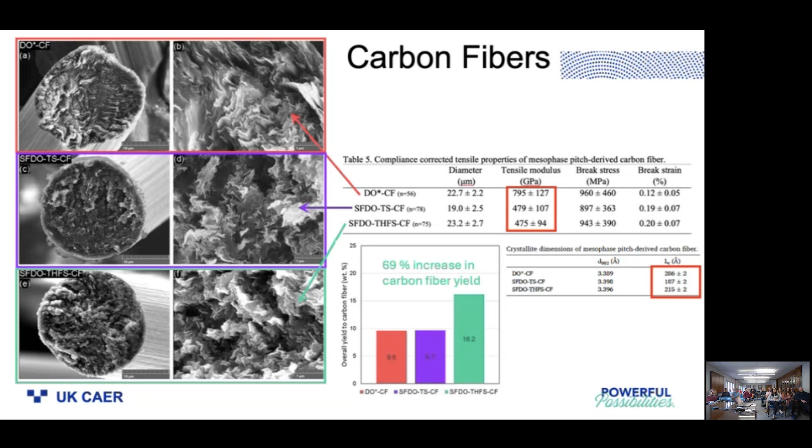So as I finish up here, a couple things I'd like to bring up: what are some other carbon fibers, and what's next. But let's talk a little bit about the global size of the carbon fiber market. I'm not going to go into huge specifics here, but I'll say it's around 150,000 tons of carbon fiber produced each year globally.

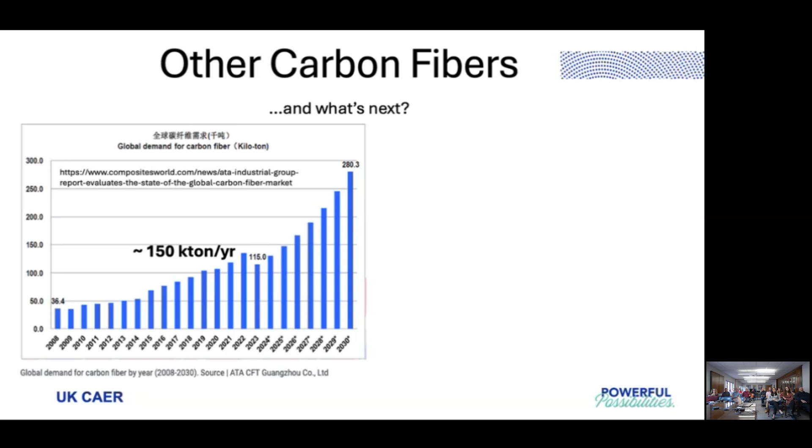That might sound like a lot, but if we look, for example, at glass fiber, something like 5 million metric tons of glass fiber is produced each year at a price of around $3 to $4 a pound. That's about an order of magnitude cheaper than carbon fiber, and carbon fiber is just far less abundant out there. But remember, glass fiber can be melt spun just really fast relative to carbon fiber.

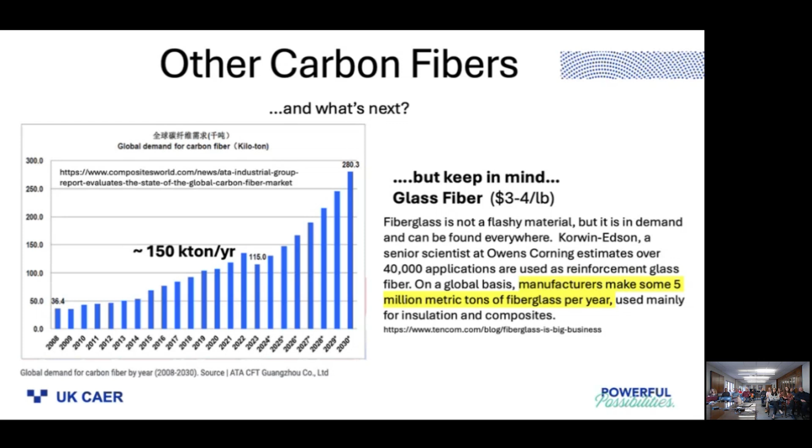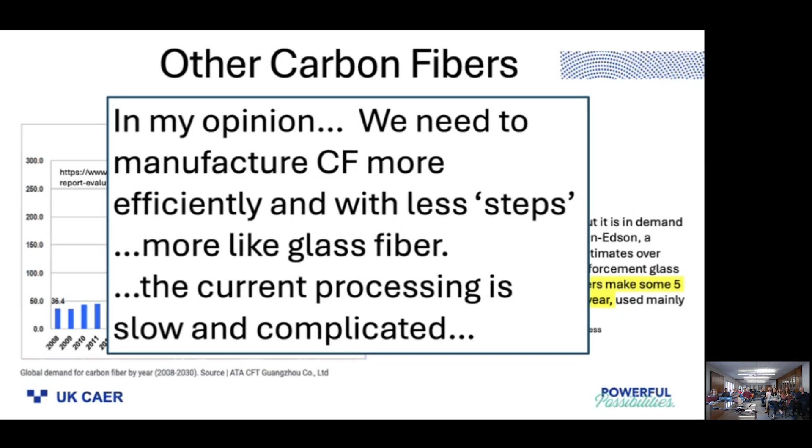So it is my opinion that we need to manufacture carbon fiber more efficiently than we're currently doing, with fewer steps to get there, perhaps more like glass fiber. I hope I've made an argument that the current process is a little bit slow and complicated.

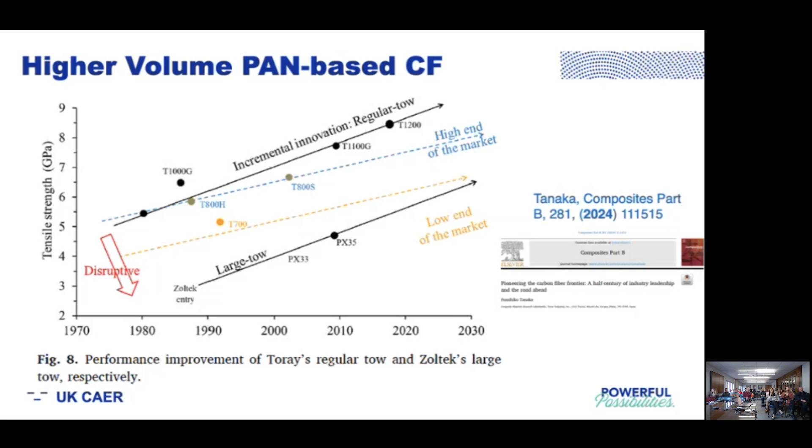If we increase to what's called a large tow, which might comprise filaments of maybe 50,000 or more filaments per tow, you can make more carbon fiber per unit time, which can drive its cost down. But you take a hit in tensile strength, and processing more and more fibers at the same time limits some of its application. So that's what's going on currently in the industry.

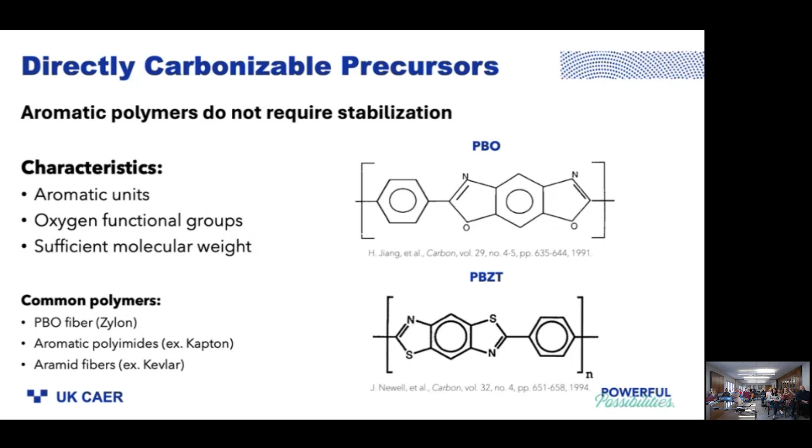So this is interesting, but it turns out the cost of these precursor fibers is so high that it makes more economic sense to make carbon fiber slowly from polyacrylonitrile still.

Bio-derived fibers—you may recall I talked about the very first carbon fibers being produced from cellulose. The other half of the tree is essentially lignin, and all the paper processing plants make lots of lignin, which is used as a fuel in paper production. But lignin garnered a lot of attention over the last, I'd say, 20 years, potentially as a carbon fiber precursor. I'm highlighting one paper that came out rather recently, and this is the first one I've ever seen describing high strength and high modulus from a lignin-derived fiber.

They talk about this stemming from applying tension, much like what was done with PAN back in the early 60s. But these lignin fibers are incredibly brittle, so applying that tension has to be done very carefully. Also baked into that paper is an oxidation or stabilization process that was tens of hours long, so there's a bit of a downer there. But again, it is an abundant, available biopolymer that can be produced into carbon fiber.

So there could be ways to arrive there much faster and much more efficiently, which would be great. Who's doing that work? This was out of Iowa State, Yixin Luo—yes, it's in the US.

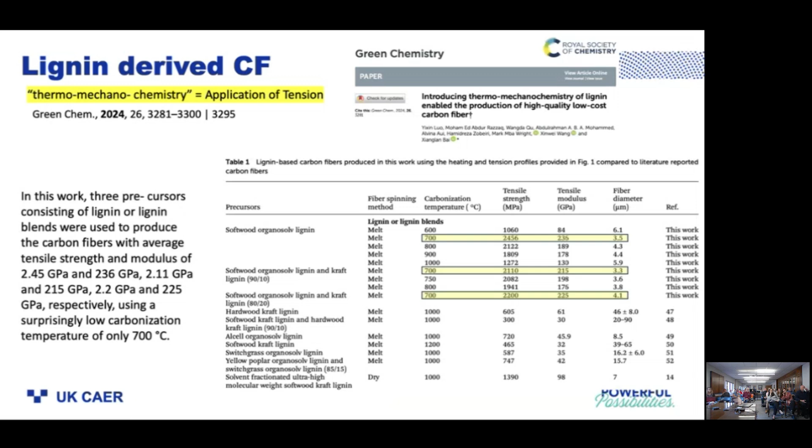Then lastly, I want to talk briefly about carbon nanotube yarns. From my perspective, these offer fewer steps altogether because there is no oxidation and no carbonization—you essentially spin fibers from the carbon nanotubes and you're done, which is attractive. Of course, the nanotubes are not abundant and they're not cheap. There's that, right? For now.

But the Pasquali group at Rice University has pioneered a lot of this. They're spinning nanotube yarns from superacids, much like Kevlar fiber is produced—this was licensed by the Teijin Japanese Fiber Corporation, which I think is why Teijin was interested in it.

Lastly, I want to talk about what I call the need for lower embodied energy carbon fiber. Producing carbon fiber is energy intensive. This particular study called out 966 megajoules per kilogram of carbon fiber composite, 704 of which stemmed from just producing the carbon fiber alone.

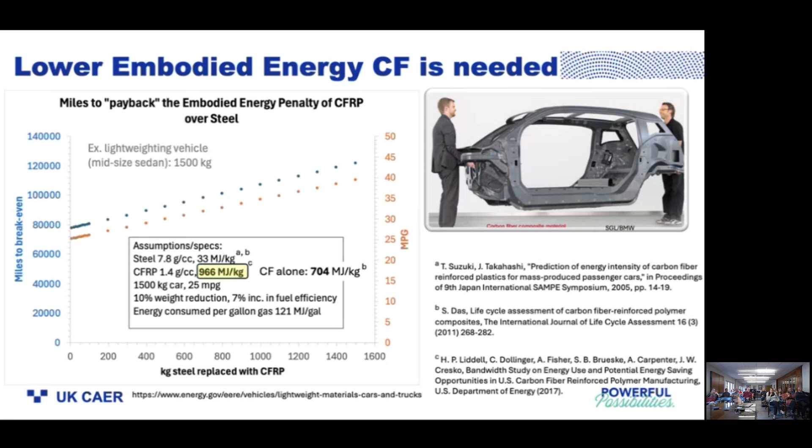We got a message from the audience from Matt McGinnis: 190 to 230 megajoules of primary energy per kilogram. Love that, dude. Okay, there you go—it's like a third. Thanks, Matt.

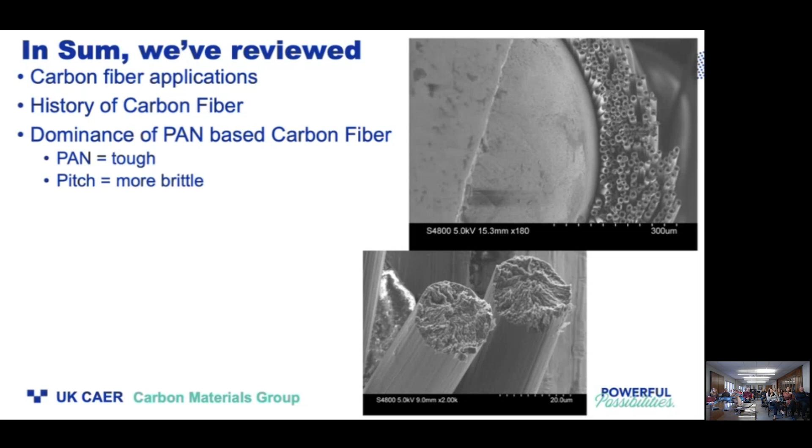So just to wrap up, let him finish guys—we've reviewed some applications of carbon fiber, the history of carbon fiber. Thanks for going on that journey with me. And landed at the dominance of PAN-based carbon fiber, these tough, resilient carbon fibers compared to pitch-based carbon fibers, which are far more brittle.

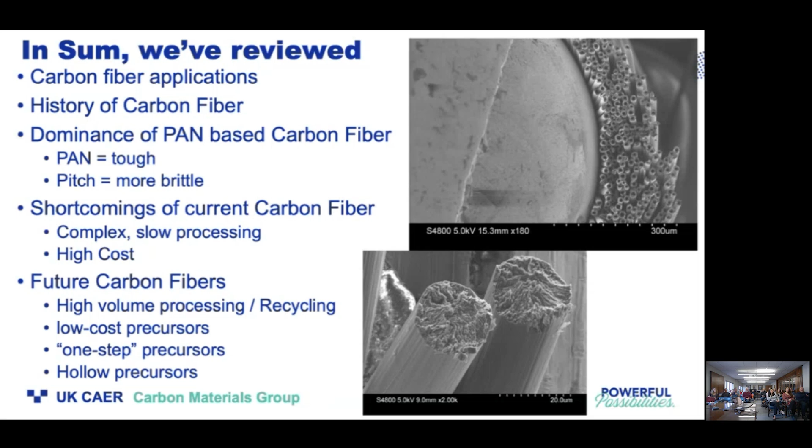We talked about the shortcomings of carbon fiber: complex, slow processing, high cost, high energy. And then future carbon fibers—what's going on is increasing the volume, lower cost precursors, the prospect of one-step precursors, and like we're working on these hollow precursors.